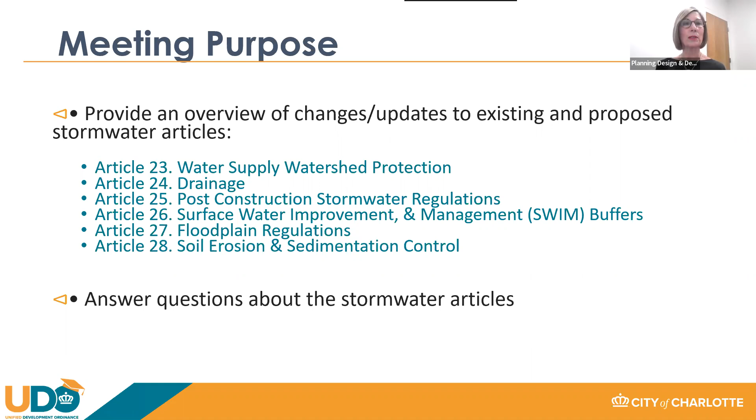Our presenters today are Gurveer Uppal, City of Charlotte Stormwater Services; Robbie Zink with Stormwater; Jordan Miller, Stormwater; David Good with LUESA, Mecklenburg County; and Jay Wilson, also with City Stormwater.

And with that, I'm going to turn it over to Gurveer to talk about the UDO Article 23, the water supply watershed updates. Thanks, Nan. I'll start with the water supply watershed updates. So the first key change here is we're moving from Chapter 10 of the City Code to Article 23 of the UDO. Variances will be reviewed by the UDO board instead of the ZBA.

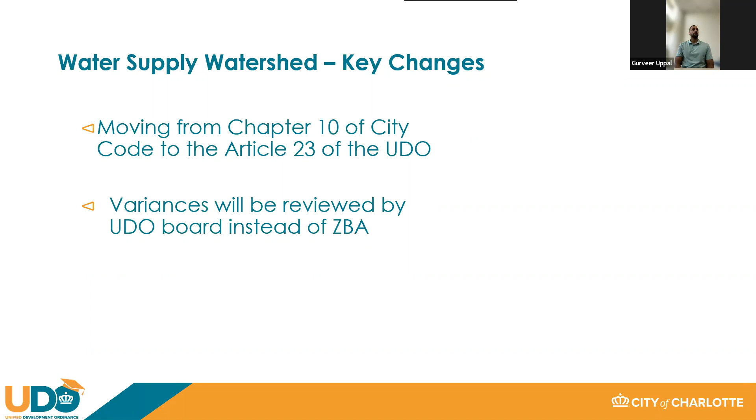Here we have a picture of the water supply watersheds. You have your Lake Norman, your Lake Wylie, your lower Lake Wylie, and your Mountain Island Lake, and those are also broken out into your critical areas and protected areas.

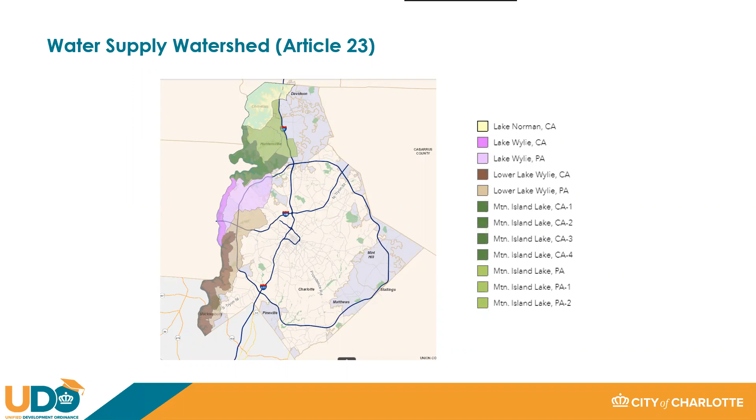This information is currently online, but we don't have it in this table format, so we are going to be putting it into a table to make it a little easier to find. Here you have the Mountain Island Lake watershed, with your low density options for your critical areas and protected areas. You'll see there's no high density option there, so everything will remain low density. Same for the built upon area — there's no option for non-residential in the critical areas, but there is in the protected areas.

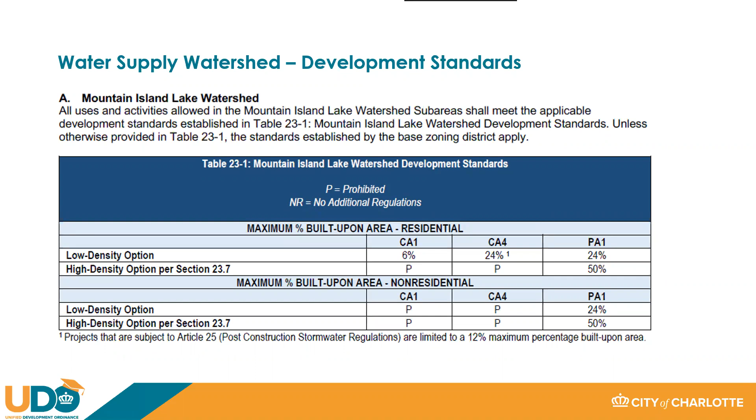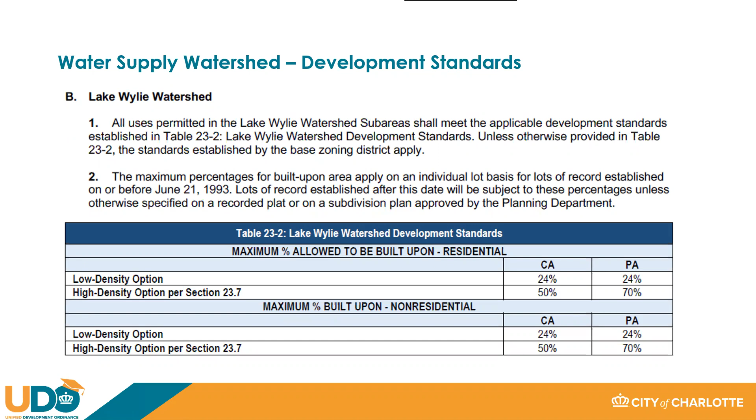Here's the same table, this one just for the Lake Wylie watershed. You have your high density option and low density option for each of the critical areas and protected areas. And once more, this is that same table for the lower Lake Wylie watershed. Again, you have your low density option and high density option for your critical area and protected area, for both residential and non-residential development.

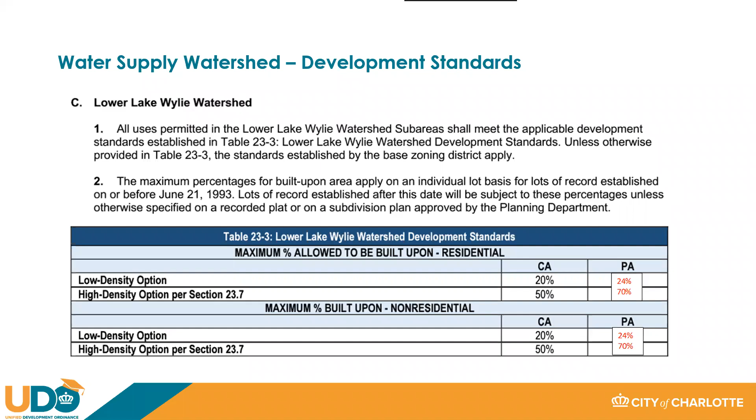Here we have your buffer requirements for the Mountain Island Lake watershed. Your critical area always has that 100-foot buffer, and then you also have your FEMA flood fringe areas. So for the critical area, your buffer becomes whichever is greater, the 100-foot or that FEMA flood fringe. Your protected area is set with a 50-foot buffer and 100-foot buffer for both options.

Below that, you have your Lake Wylie watershed buffer requirements for both the critical area and protected area, with those same two options for high density and low density.

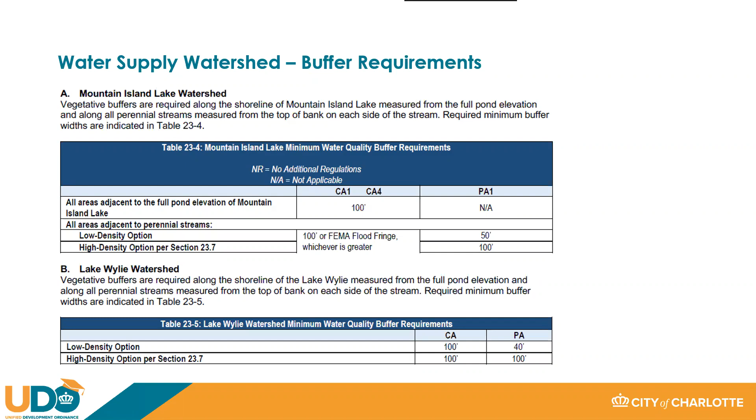And then I'll turn it over to Robbie for drainage.

Thank you, Gurveer. We should probably set this disclaimer at the beginning: for those that went to the city county workshop a few weeks ago, you can probably do some other work or take a nap for a little bit, because a lot of this is the same information we shared at that time.

So this Article 24 is the drainage article. It's a new article. There are no real requirements in any ordinance per se currently, so it's all new. The applicability applies to the construction of any new structure, driveway, streets, or parking lot, or the installation or modification to a city's drainage system, or land disturbances that modify or impact existing drainage features.

The intent of this article mainly is for residential infill that the city is seeing an increase in over the last few years, and that has created numerous issues for stormwater and for adjacent property owners.

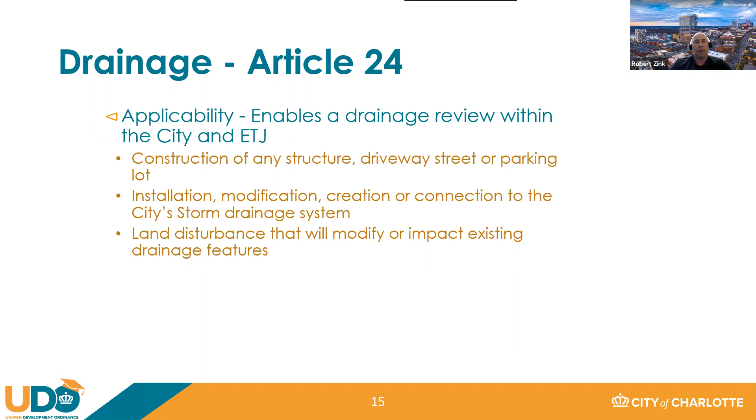So going along with that, why do we create the article? It is modifications being made to the system which we aren't aware of, structures within our easements, substandard drainage being installed, properties putting in flood prone areas, adjacent property flooding, driveway conflicts, and developing in areas with known drainage issues.

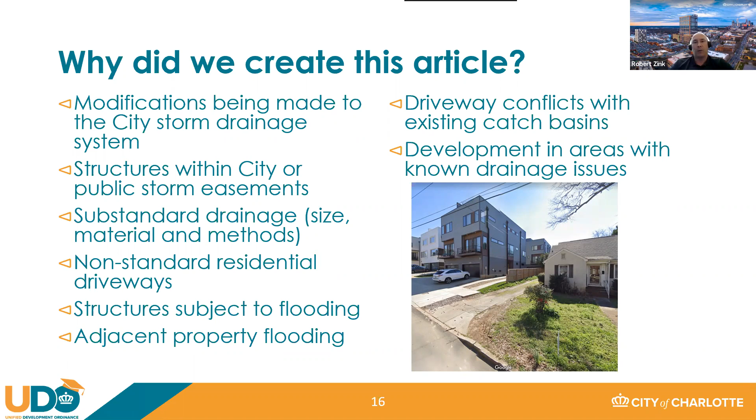Okay, so next we'll go through a few examples of things that have occurred within the city that have created some issues for stormwater. These are the things that we're trying to prevent with this new article.

In this situation, you can see in the top picture some existing single family houses that were torn down and rebuilt with large duplexes. On the left-hand side, you can't see it, but there's a stream right next to this. Modifications were made to a gabion wall, increasing its height, which creates some stormwater issues. And the other issue is this is right near a low spot since it's near a creek, and the driveway doesn't take much for water to overtop it and flow down into the garage and the living space.

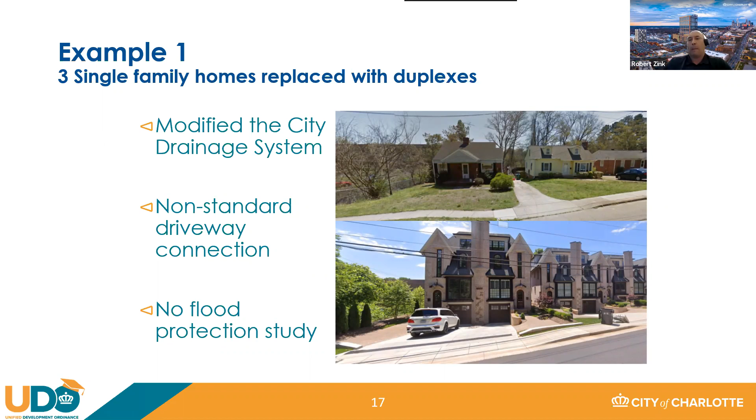Next. Another single family redevelopment. The left-hand side is kind of a before picture, and the bottom left is actually during construction. There was a drop inlet in this yard. The house was rebuilt, the yard was raised up, and there's a drop inlet you can barely see in the back part of the picture. It was raised, and on the bottom right you can see after it's built, with the fence, there was no way for the water to drain out.

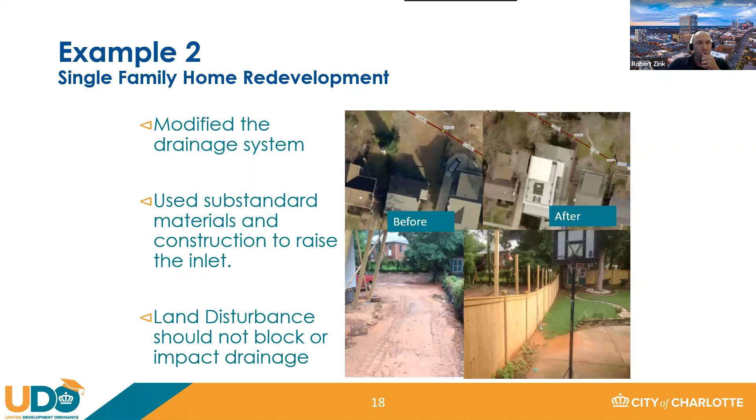Sorry, next. This example is of a porch or expansion to an existing house, and it was built over the top of a 24-inch pipe that actually had an easement on it. That pipe is about 7.5 feet deep, so as you can imagine, any issues with it, or maintenance of it, is impossible.

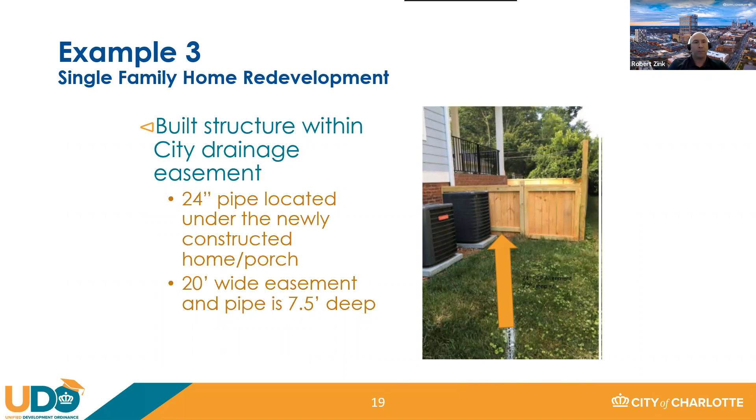All right, this last example is another tear down rebuild, putting in 4 lots where there used to be 3 parcels. In the bottom left picture, you can see where the houses were built, the grade was raised, and they installed pipe. The pipe was undersized. They installed HDPE, which if constructed properly is okay, but we've found that's rarely the case, it's rarely installed properly, so there are always numerous issues with it if it's not done correctly.

In this case, that unit on the right, the house, had about 3 feet of water in it in the first significant rain. Next.

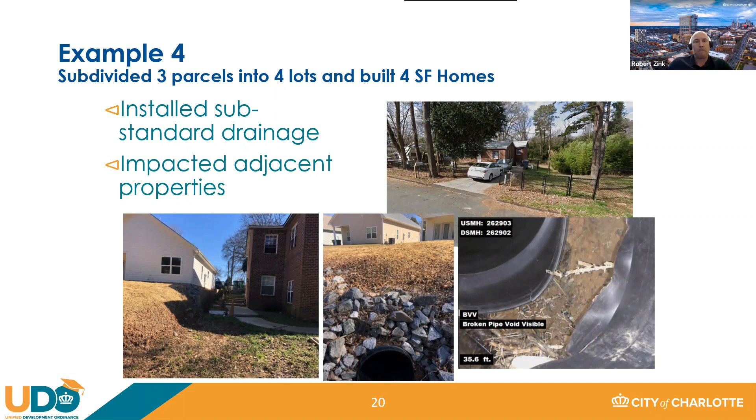So the process we're envisioning to comply with this is a concurrent review with the building permit process at the county. Approval of this permit would be required prior to the building permit, and review of the stormwater is sorted into 3 tiers. For those of you that listened to the urban forestry or tree presentation a few weeks ago, we do plan on doing a concurrent review with them, since they'll be looking at very similar things.

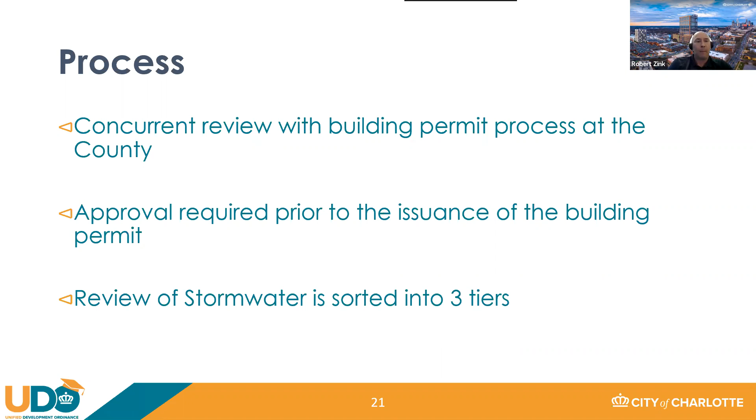Back to the tier issues in our tier document we're creating: a Tier 1 review is for minimal or no impacts to existing drainage systems, so no sealed drawings or design would be required. Here's some general plan requirements: site plans to scale, proposed grading if grading is occurring, proposed built-upon area, and existing and proposed infrastructure with dimensions from that infrastructure.

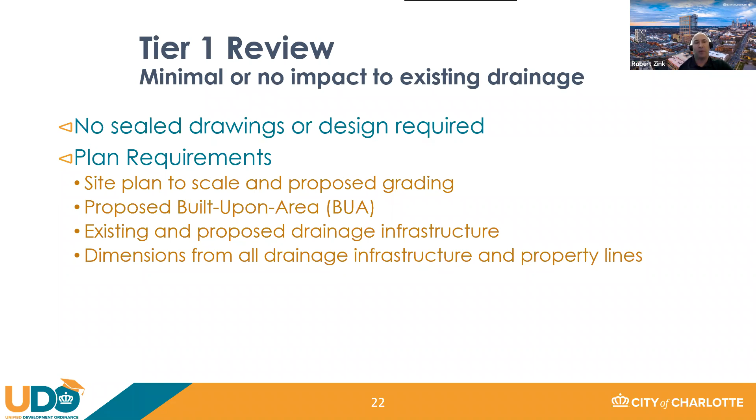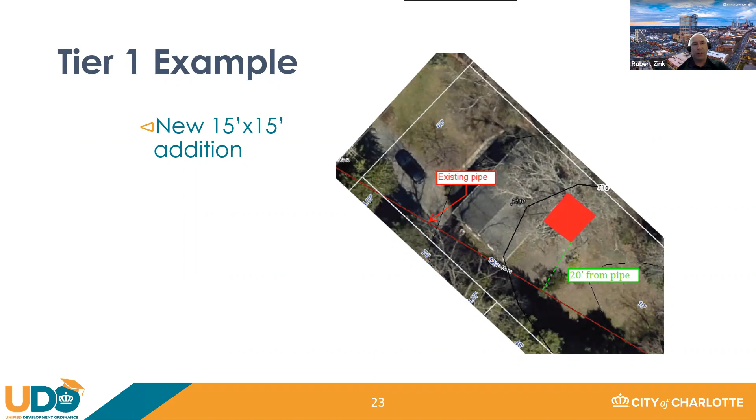This is an example I drew up of a 15 by 15 addition on the back of a house. The red line on the bottom shows an existing pipe, and dimensioning from that, you can see we're about 20 feet away from the pipe. So we believe there's no issue here, and that would be a quick approval.

Tier 2 is where new infrastructure or modifications to existing infrastructure would apply. These would need to be sealed by appropriate design professionals with existing and proposed detailed grading, and the drainage plan would need to show existing and proposed easements and any supporting calculations.

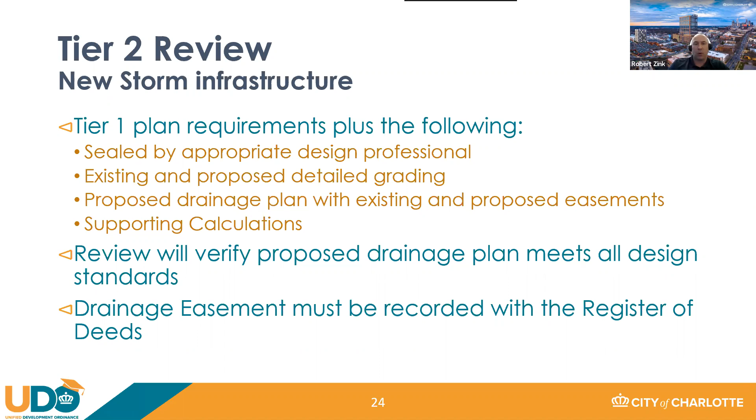The review will verify this proposed drainage plan meets all design standards, and any easements must be recorded with the Register of Deeds. Here's another example on the same site, a 20 by 30 garage, closer to that pipe, or actually over the top of the existing pipe, so it would need to be relocated. As you can see, we drew a driveway over the top of the pipe, which would be okay, so we're not preventing that.

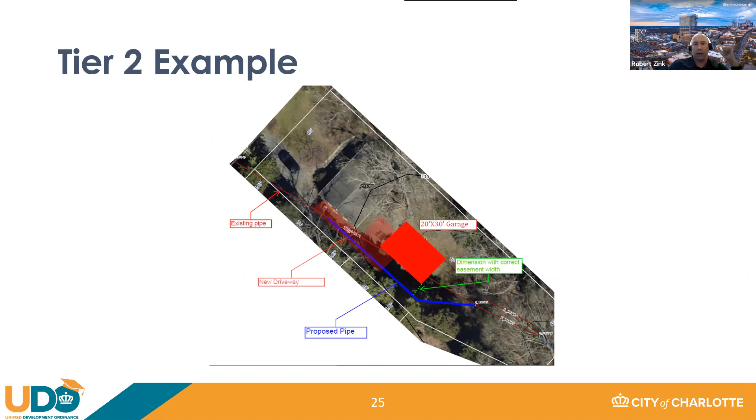Tier 3 is for where you would find flood study requirements and/or post-construction stormwater requirements, which Jordan will address further. This includes Tier 1 and Tier 2 plan and calculation requirements, plus a flood study if required, which is needed if the flow is greater than 50 CFS in the 100-year storm. It would also have to show any post-construction stormwater compliance using our BMP manual.

Plats would be required to record the easements and any stormwater protection elevations and stormwater elevation lines.

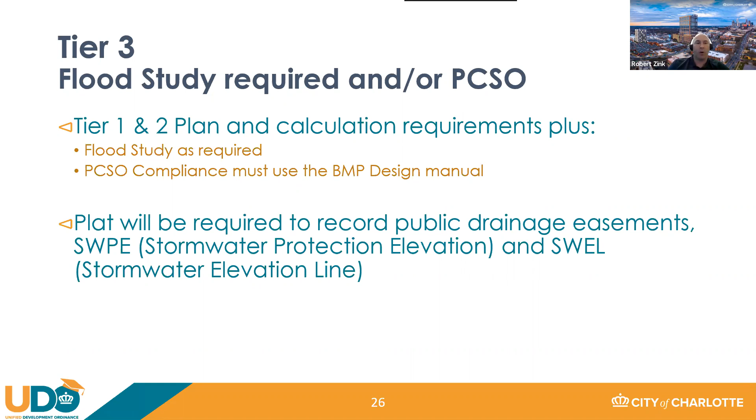This example is of a new home adjacent to a creek, which does get more than 50 CFS in the 100-year storm. A flood study would be required and would possibly have post-construction stormwater requirements.

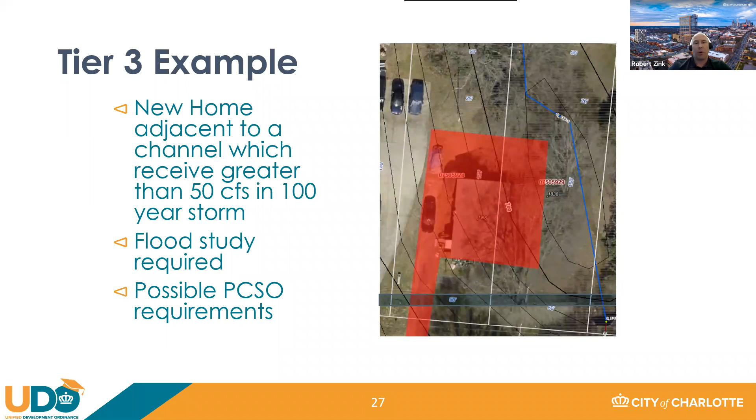Next, we'll go to Jordan Miller with the post-construction changes.

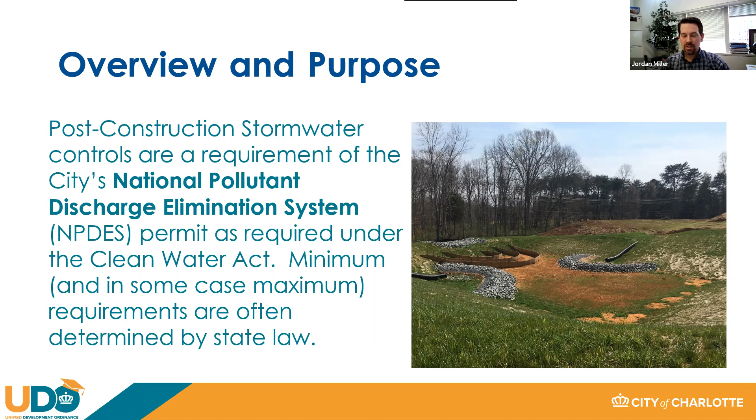A little bit of background: I know a lot of folks already know this, but the city's post-construction stormwater ordinance is required. All large municipalities have to have something to regulate flow and pollution from sites after construction, so this is a requirement of the city's NPDES permit.

Overview and purpose, none of this changes. It's an existing ordinance. We want to minimize impacts to downstream properties from both a flooding and pollution perspective, improve surface water quality, and minimize damage to infrastructure and property. A key term: built-upon area is impervious or partially impervious materials, including gravel, rooftops, and those types of things.

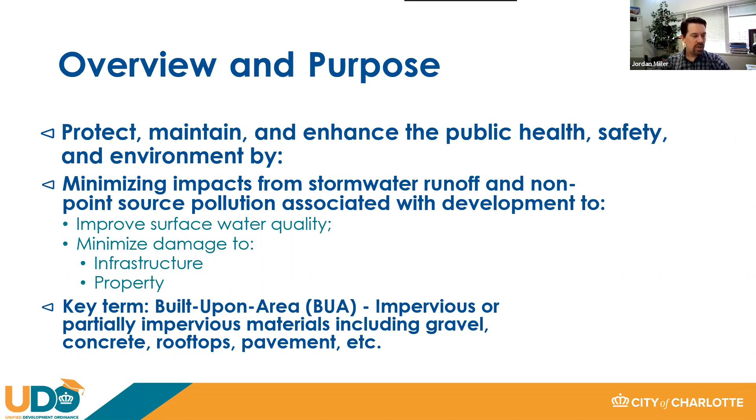Current requirements for post-construction reside in Chapter 18 of City Code. Stream buffers vary from 30 to 200 feet, dependent on location and drainage area to the stream. There are several functions of the buffer, but essentially they protect habitat and improve water quality within a riparian corridor around creeks within Charlotte. These are required on all intermittent or perennial streams, as determined locally by a qualified professional.

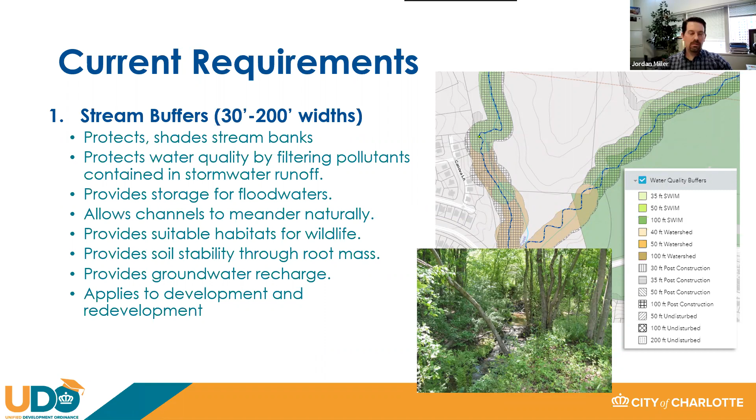Currently, we have a natural area requirement in post-construction. It's essentially a percentage of the site depending on the development type and density that can be provided in several locations on the site, but it's just a preserved area to remain natural or reforested.

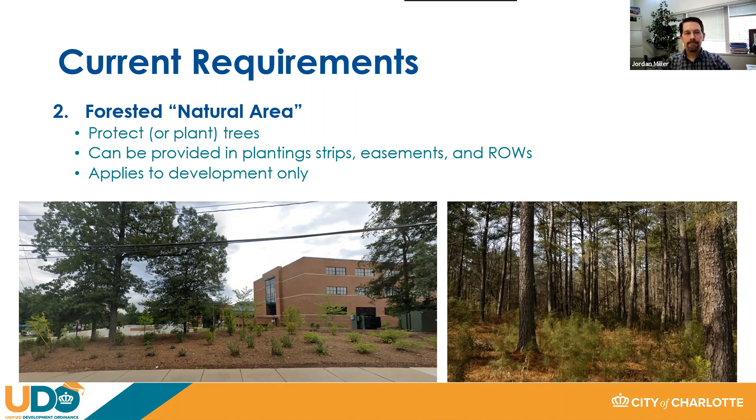The biggest section of post-construction is the structural controls required, providing detention and preventing downstream flooding as well as water quality. We have several storms that must be detained to prevent downstream flooding and erosion, and pollutant removal required within these stormwater control measures, or stormwater BMPs as they were previously called. Some pollutant removal requirements depend on watershed; there are 3 different watershed districts within the city's jurisdiction, so depending on where you are, you may have a slightly different requirement, all listed within current and proposed ordinance.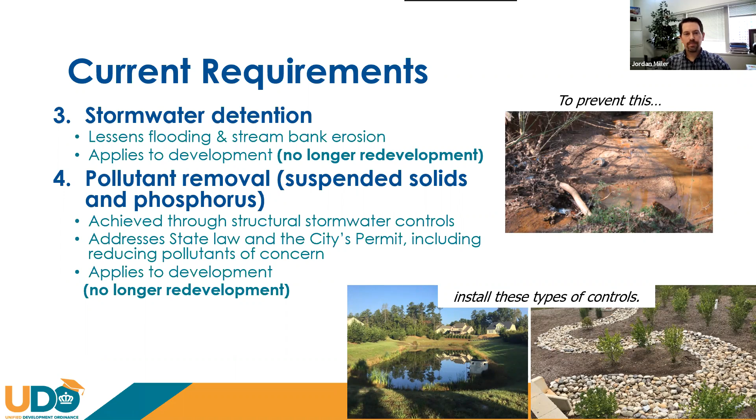So most importantly, that was just a little background. What's changing is this moves from Chapter 18 to Article 25 in the adopted UDO. There are revised thresholds for compliance of what triggers a post-construction review and approval. We also looked to align some requirements across our older ordinances and remove some older exemptions. Post-construction was originally adopted in 2008, and a couple of the exemptions no longer apply, so we removed those just for ease of readability.

Go ahead, next, Brennan. I'm trying. Hold on. Oh, you're good.

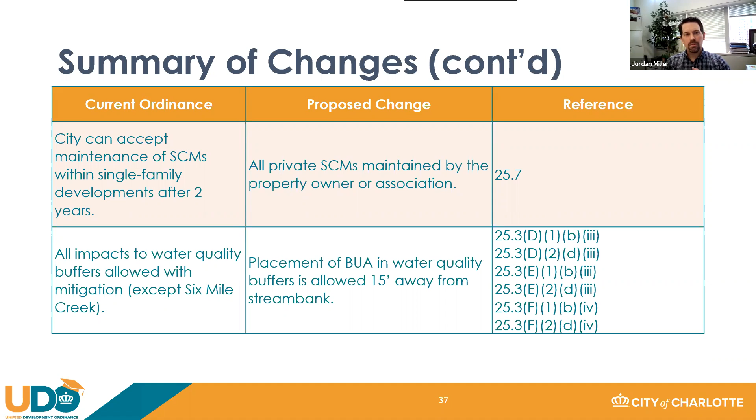Oh sorry, a couple more. A couple exemptions to flag for folks who might not be as familiar with this ordinance. Following are exempt if approved prior to July 1, 2008 - that's the current date for post-construction, so that carries over in the UDO. Essentially it'd be a plan submitted for approval or somehow still valid and unexpired. So if there was a plan still valid through a long amount of resubmittals, or some ongoing construction that was still valid, it would remain exempt if that occurred prior to that date, or if you had a preliminary subdivision plan still valid for non-residential.

And then the common law vested right is a typical exemption for most municipalities when it comes to stormwater regulations. So that remains, and it's somewhat case by case, as you can see there - it's dependent on what occurred on the site and at what time.

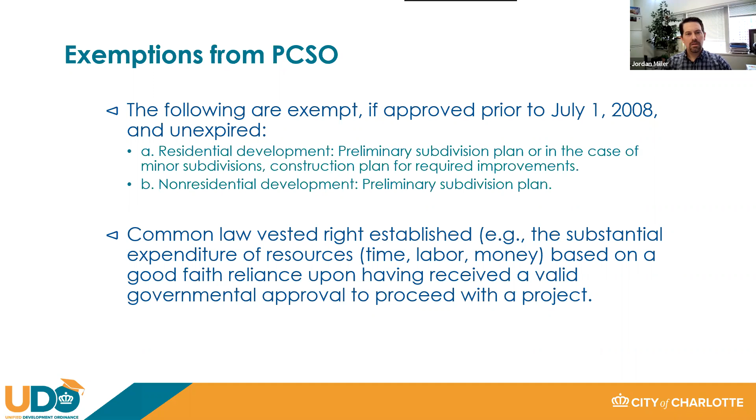Next, one sort of maybe now less confusing exemption is that we've had an exemption for conditional zoning districts that were approved prior to the July 1st, 2008 date. There were some sunset dates when you had to submit plans, but those have all since passed for many years, so we removed that language. Now it's just if you have an initial rezoning that was approved prior to that date and has been built out 22.5% prior to that date on the screen and meets a couple extra requirements, then they would continue to be exempt from this new version of post-construction, just as they were from the current post-construction ordinance.

And then the last one, I'm mainly just flagging what I talked about a minute ago with the built upon area or disturbance. It is an 'and,' so you have to both be under 5,000 square feet of built upon area and disturb less than 1 acre in order to be exempt. If you hit either one, then you do have to show compliance with the ordinance or the article.

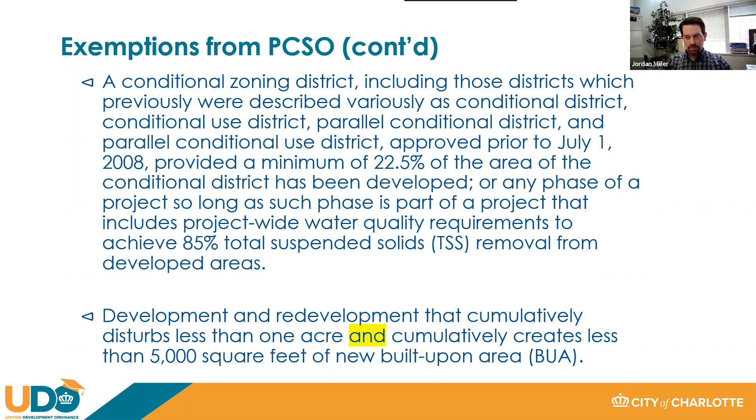These are two other existing exemptions that rolled over. You have a lot in the city's jurisdiction that was recorded prior to July 1st, 2008, and is less than 20,000 square feet in size, then it is exempt from this article, just as it would be in the current ordinance. One very important caveat is that it applies only if you are developing just that lot. If there's any part of a larger common plan of development, which generally means there's a definition in the article — I won't read it word for word — but if it gets combined in any way with another lot, then that exemption would not apply. So that should be one lot recorded prior to 2008, less than 20,000 square feet.

And the last exemption is very uncommon, but it's required to be in there. Essentially, if you were having to meet a requirement from one of those sections, the work associated with that would not somehow trigger this requirement. I don't know of an actual ongoing farming or forestry activity that's occurred in the city that's met this, but that remains in the ordinance as well.

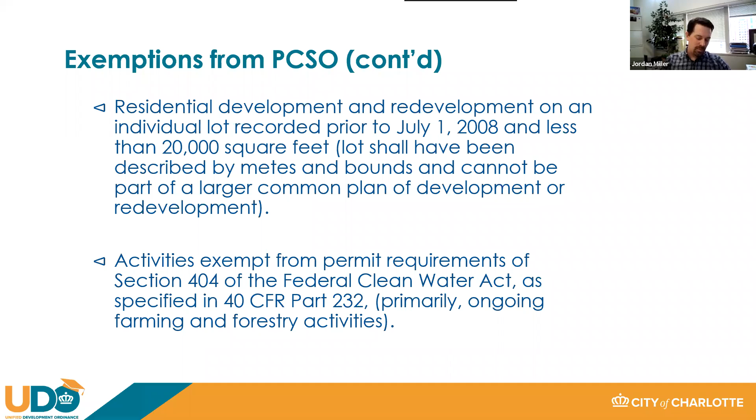And I'll kick it back over to Gavir.

Thanks, Jordan. I'll go into surface water improvement and management buffers, your swim buffers. We touched on some of this already, as this information was also in that previous PCSO portion. Our environmental report card shows that many of our streams in the Charlotte area are not swimmable or fishable, so we are working to reverse that or reduce the amount of pollution in the streams. That's where the buffers come into play, and these are a requirement as part of the post-construction stormwater ordinance.

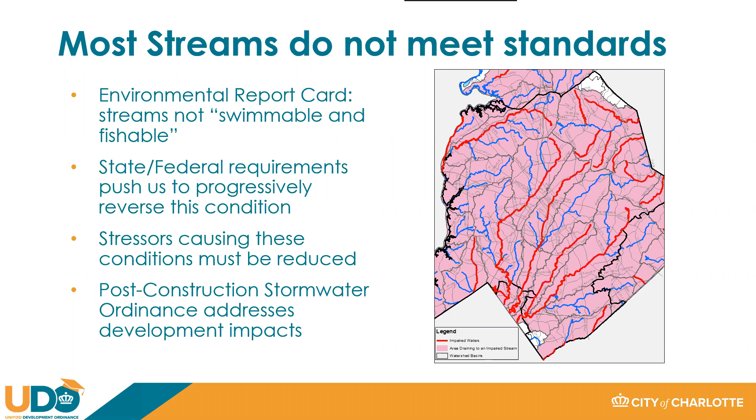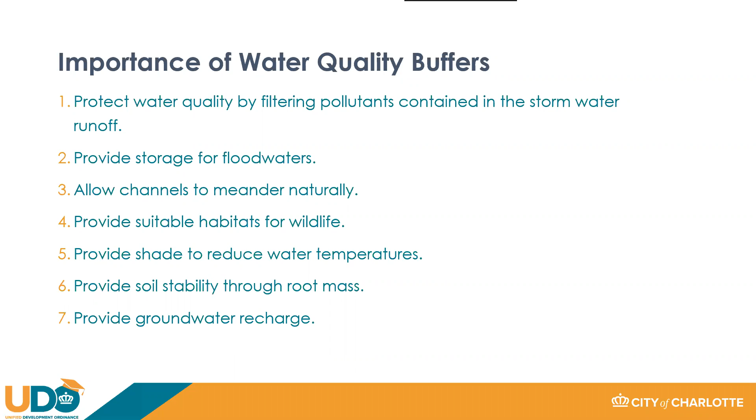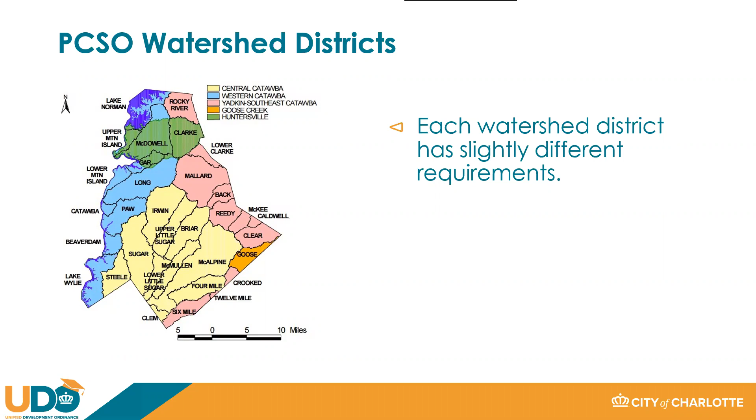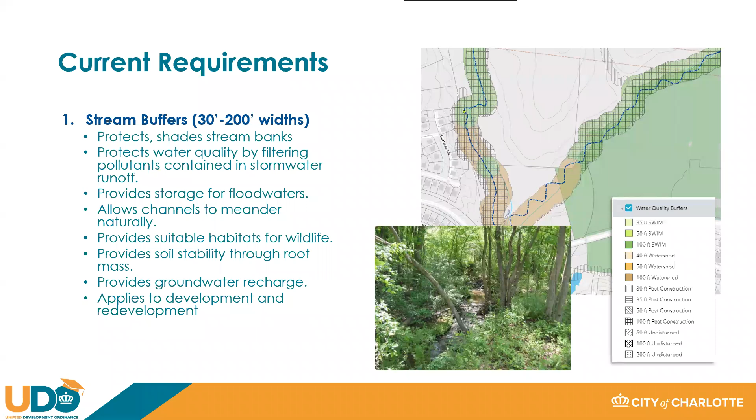Once again, we have a picture of those buffers, which vary in width from 30 to 200 feet depending on the watershed. The key change here is moving from Chapter 12 of the City Code to Article 26 of the UDO.

Basically, the swim buffer has been in effect since 1999. This applies to all intermittent and perennial streams that drain at least 100 acres. Once again, those widths vary from 35 to 100 feet. If no buffer is required, we do recommend that you maintain a 10-foot undisturbed vegetative buffer measured from the top of the bank on each side of the stream. Streams that are to be piped in must get approval from the U.S. Army Corps of Engineers and NCDEQ.

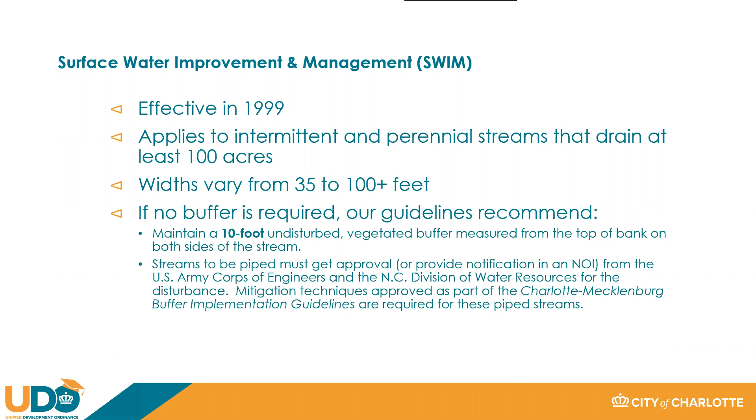And if you are piping that stream in, you are required to mitigate for the buffer that will be going away. Let's go to the next slide.

Here we put those numbers into a table to help identify your buffer widths for each region or stream size. You can see you have for streams draining greater than 100 acres, with your stream side zone, your managed use zone, your upland zone, and the total buffer width.

For those streams draining between 300 and 640 acres, you have the middle row with 20-foot, 20-foot, 10-foot, giving you that 50-foot width on the buffer.

For those streams draining greater than 640 acres, you have that 30-foot stream side zone, that 45-foot managed use zone, and then your upland zone will be 25 feet plus 50% of the area of the FEMA flood fringe beyond 100 feet.

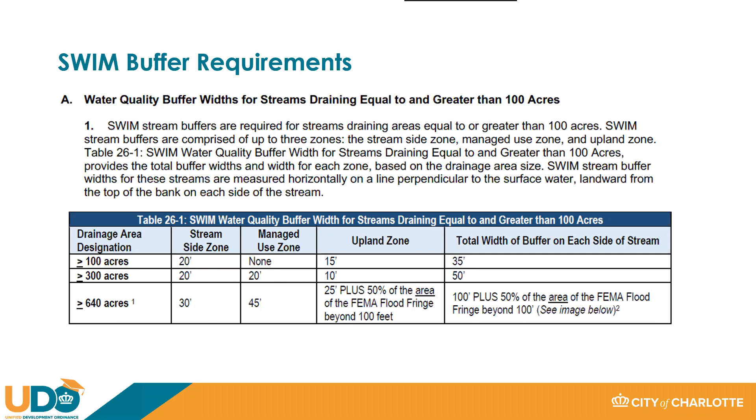On the next slide, we added a little graphic to help you determine that width.

On the first one on the left side, if your 100-foot swim buffer is closer to the top of the bank, your 50% area will be measured from the area between the FEMA flood fringe and the encroachment line.

If your community encroachment line is closer to the top of bank than the 100-foot swim, then you'll take 50% of the area between the FEMA flood fringe and the 100-foot swim.

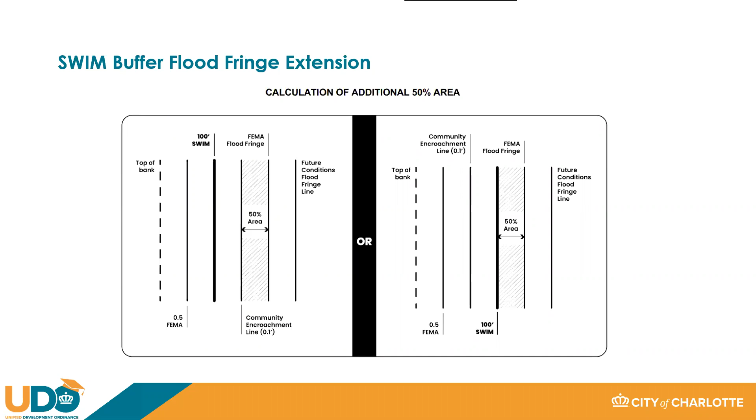Here we have an updated graphic showing those 3 zones: your stream side zone, managed use zone, and your upland zone.

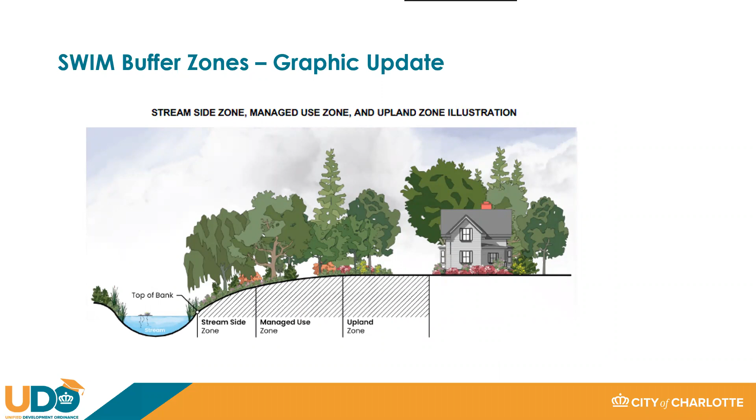This is currently in the buffer implementation guidelines, and we're just updating that table. It shows the function, the targets, and the impacts of each of those zones for your stream side zone, your managed use zone, and your upland zone. The most restrictive is the stream side zone; a bit more is allowed in the managed use zone; and the upland zone for the most part can be impacted in all situations.

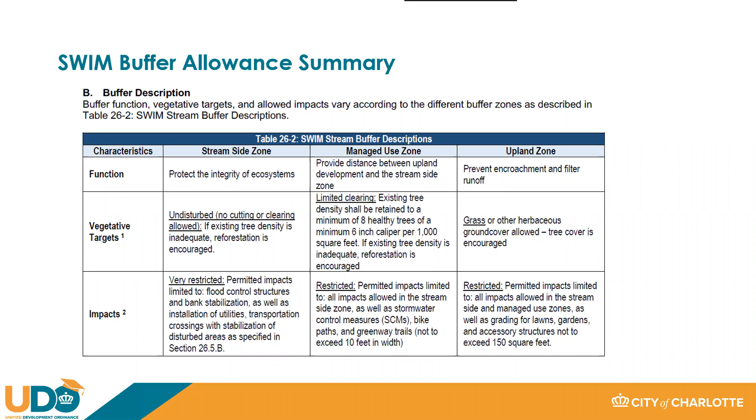Let's go to the next slide, and then I'll turn it over to David for floodplain regulation.

Good afternoon. I'm going to give you an overview on floodplain regulation in Mecklenburg County. I'm the floodplain administrator for the city of Charlotte and all 6 towns, and there's a fairly consistent regulatory scheme across the entire county. Even though the city and the rest of the towns have individual floodplain ordinances, we're trying to be consistent.

For those of you that don't work in this area, the purpose of the floodplain regulations is to reduce impacts to people and property from flooding during major storm events.

Another purpose of the floodplain regulations is that you have to have a floodplain ordinance in place in order to participate in the National Flood Insurance Program. So for flood insurance to be issued in Mecklenburg County, we have to have a floodplain ordinance with minimum standards.

These standards are national standards, since this is a federal regulation. You have to meet these minimum standards in order to issue flood insurance.

Another aspect of the city of Charlotte's floodplain ordinance is that we go above the minimum standards. We have certain higher standards that we regulate to.

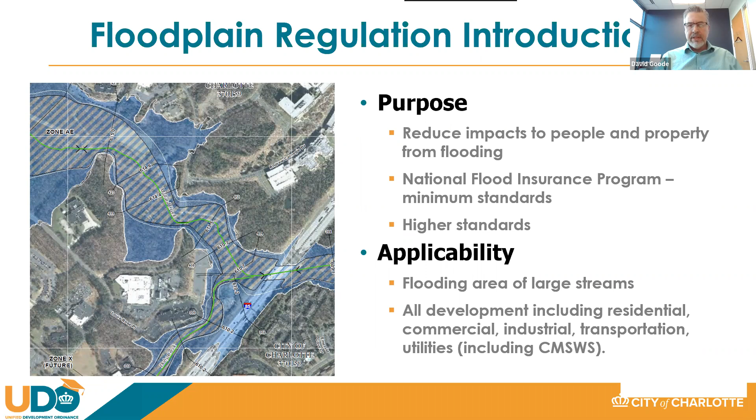Now I'm just going to generally talk about some changes that were made prior to the adoption of the UDO, and then I'll talk about some individual changes that are included in the UDO adoption.

If you do work in this area, you're probably familiar that last year on January 1st we made some revisions to the previous ordinance, because we needed to get some stuff done ahead of the UDO since it was becoming important and critical.

One of these issues was that the North Carolina Department of Emergency Management creates a state model floodplain ordinance, and updates it periodically. In order to participate in the NFIP, you have to conform with that ordinance. So we had some changes to make so that our ordinance as of January last year would be compliant with state requirements.

The second issue we dealt with a year ago was that in Mecklenburg County, for all these streams, we regulate using what's known as the future conditions floodplain. The way we determine the future conditions floodplain is by estimating the storm height for a 100-year storm as if the watershed upstream of some point along that stream has been fully built out.

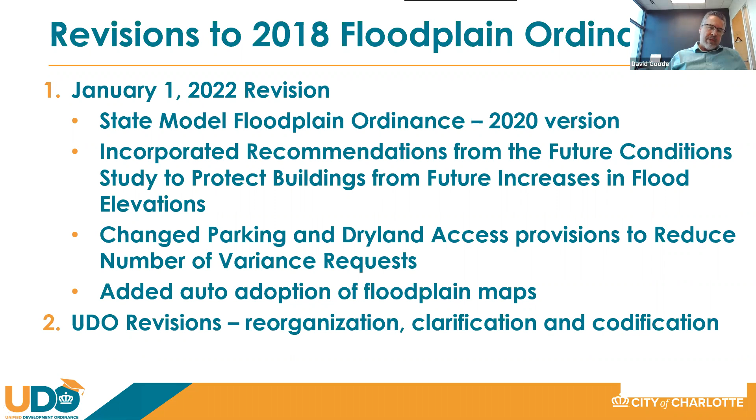Okay, here's the UDO specific changes that we made. For the floodplain ordinance, there weren't many detailed changes in the UDO. The main change is we used to have a standalone ordinance, all in one place, and now the ordinance is divided into two different articles. The meat of the floodplain ordinance, all the specific standards, is located in Article 27 of the UDO, and the enforcement provisions have been separated out to Article 39.

Enforcement provisions are like notices of violation, corrective actions, penalties, that sort of thing. So for folks used to working in the floodplain area, they'll have to look in two separate places, but that's the main change.

Another change that will be adopted under the UDO — and these last few changes are just codifications of the way we normally do business — is that under federal regulations, you are allowed to notify an insurance company or a lender if the owner of a building in the floodplain has a violation, meaning that building is non-compliant with federal regulations and the ordinance.

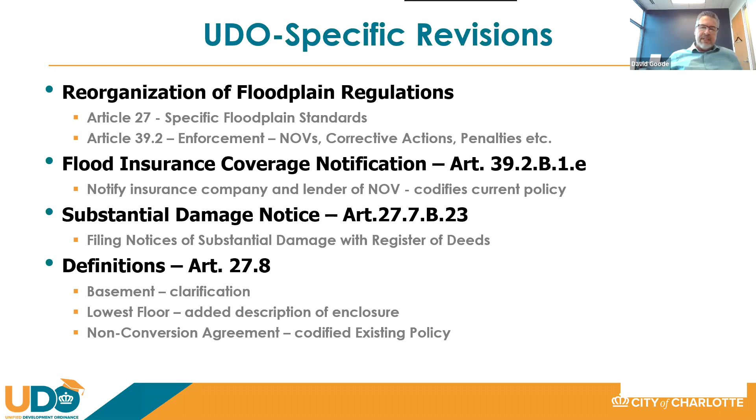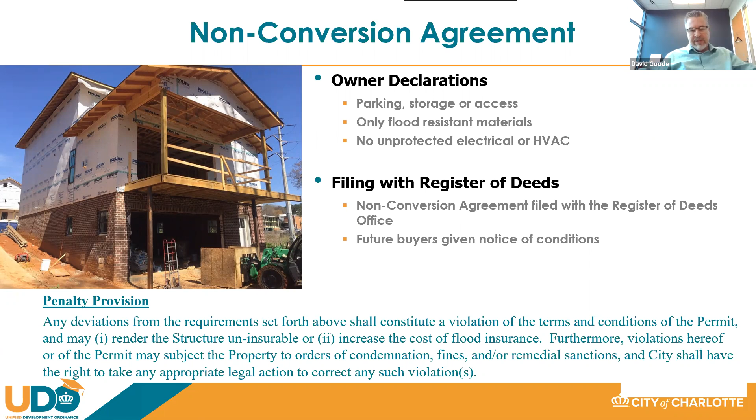All right, good afternoon, everyone. I'll be handling the last section here, Article 28, the Soil Erosion and Sedimentation Control Ordinance. Before we get started, I'll just say that a lot of the changes to existing Chapter 17, future Article 28, are to reflect changes and updates to state law. So there aren't any big changes in store that were UDO inspired, but I'll try to point some of those out as we go on.

Just briefly, for those of you who aren't aware, the erosion control program or construction site stormwater controls are a requirement of the city's NPDES permit. Just as construction sites have to have permits to discharge their effluent to the waters of the state, so do municipalities and cities. As a requirement of the city's permit, a delegated authority or erosion control program is required. The city's ordinance has traditionally been more stringent than state law, and I think we retain a lot of those protective features that are needed in a growing and high density urban area like Charlotte is and is becoming more of. Next slide, please.

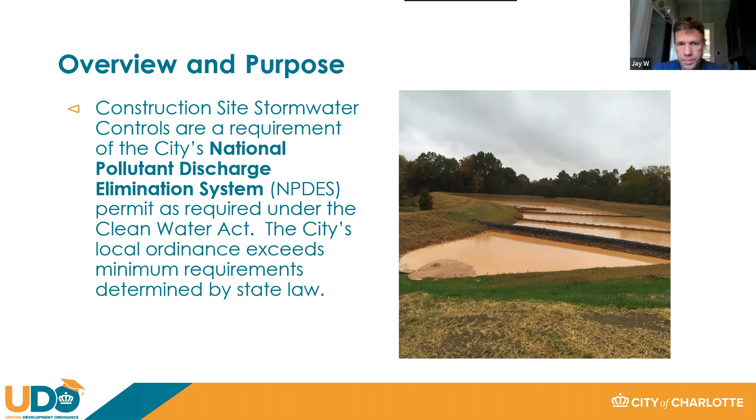So just briefly, the overview and purpose: the idea is that we protect, maintain, and enhance public health, safety, and environment by minimizing impacts from erosion and sedimentation during active construction. Primarily, that objective is to protect surface water quality. We protect private property and infrastructure, but really a lot of this is coming from the place of protecting surface water quality and minimizing damages to streams, creeks, water features of all types, and then of course infrastructure and property along with that.

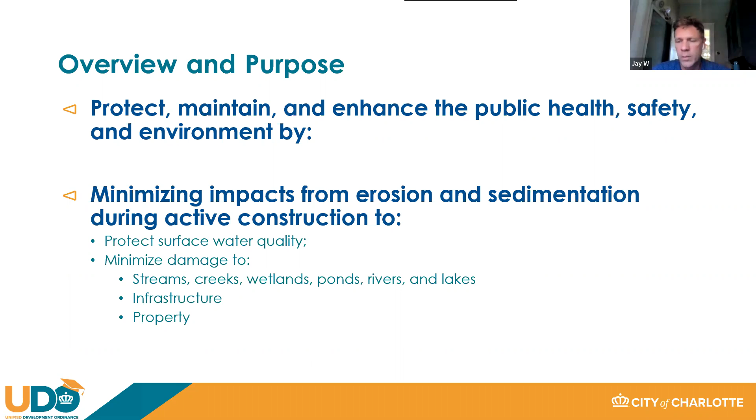I wanted to go over some of the current requirements of the ordinance, and this is really more of a review for folks that may not be aware of what the erosion control ordinance is responsible for and the things we're trying to accomplish. These aren't all the requirements, but these are most of them, at least broadly speaking. We'll go through some of these. Briefly, all land disturbing activities—anytime the surface of the earth is disturbed or altered—those activities must provide adequate control measures. And if you are participating in a land disturbing activity that disturbs 1 acre or more, those protective measures must be ensured with an approved soil erosion and sedimentation control plan prior to beginning the project. The ordinance goes on to outline some control objectives: we identify critical areas, limit time of exposure, limit exposed area, control clean water that originates upstream of the site, and of course control sedimentation and the damaging velocity at the outfalls.

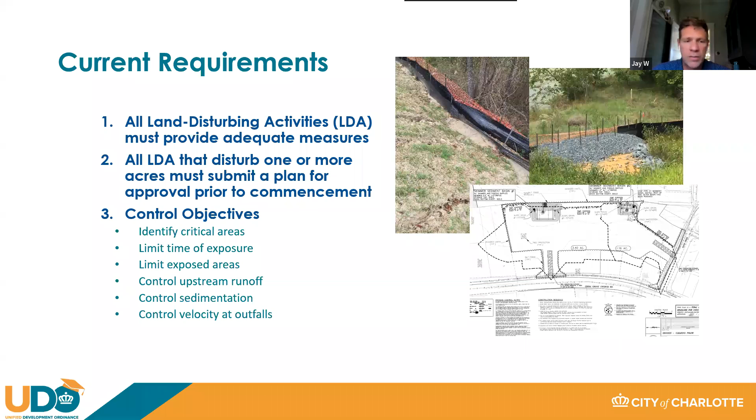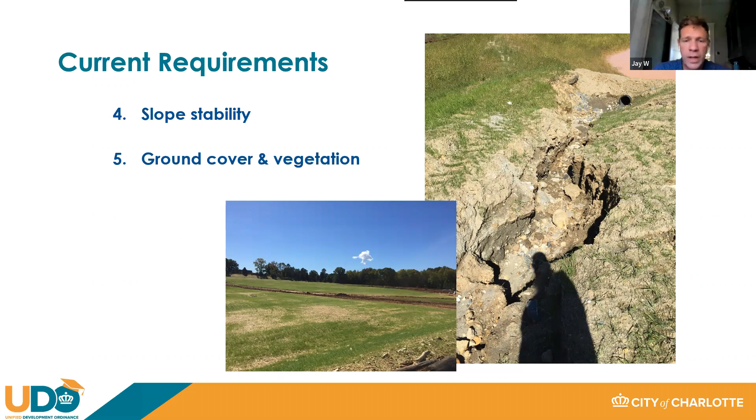Other requirements and notable requirements are for slope stability and ground cover and vegetation. So there's the two troublesome areas during land disturbing activities that the ordinance helps us protect against negative impacts with. The current requirements also require that site operators monitor and maintain their active construction sites. The ordinance states that persons conducting land disturbing activities must inspect their measures at regular intervals to ensure adequate performance, and this is an area where our ordinance has traditionally been more stringent than state standards and continues to be so. The maintenance requirement is such that when measures are not performing at their design or optimal efficiency, site operators must take action to correct those deficiencies so that they function as designed.

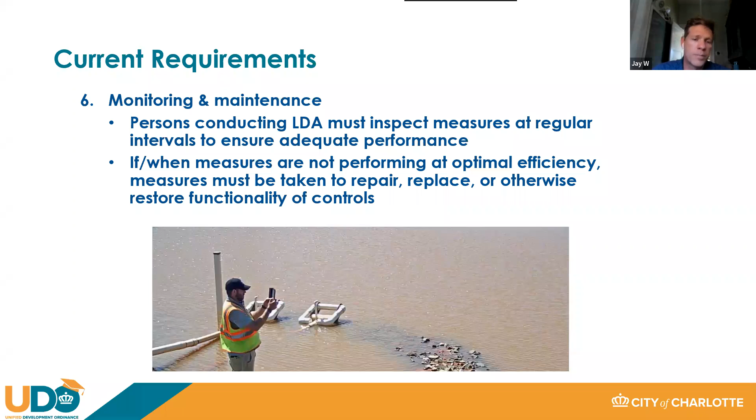Some of the changes I've mentioned already: we're moving from Chapter 17 of this Code of City Ordinances to Article 28 of the UDO. The meat of the ordinance will be in Article 28 now, and really the vast majority of the changes you will see in the UDO as compared to Chapter 17 are to reflect changes in state law since the last ordinance update. For those of you who've been plugged into this process, you understand that UDO has been going on for a few years. We've known this was in the works even before, and we had been trying to be efficient with our requests to council for updates to the ordinance, so we decided to roll these state required changes in with the UDO. So the vast majority of the changes we made to the soil erosion and sedimentation control section are simply to reflect changes in state law.

We also, outside of those requirements, made some changes to align requirements across permit types. What I mean by that is there are several agencies that have jurisdiction over water quality and soil erosion and sedimentation control. At the state level, you've got land quality and water quality. Land quality is where the land disturbance regulations are housed, the Sedimentation Pollution Control Act. Water quality is who issues the permits so that construction sites may discharge their treated water back to the waters of the state. So sometimes, even at the state level, some of the requirements vary—one rule may say you can do things one way, and another rule lines out a more stringent requirement. We've always had a blanket statement in our ordinances saying the most stringent requirements apply, rather than relying on that blanket statement. We try to just find the more stringent requirement in our ordinance in an attempt to minimize confusion.

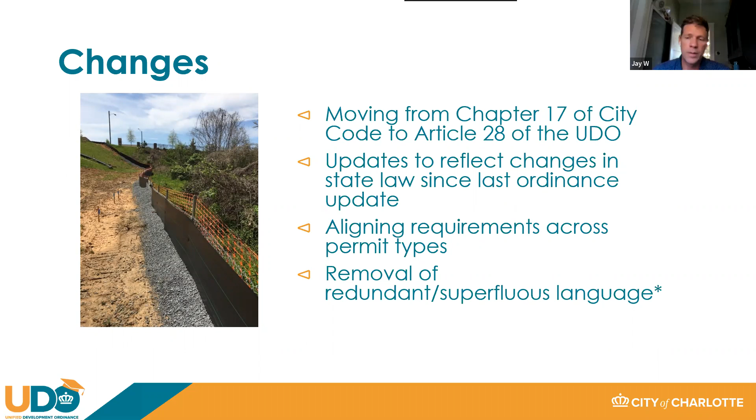Next slide, please. This is a summary of changes. This is by no means a comprehensive summary of the changes, but it includes some examples of the types of changes that were made. For anyone interested in a more complete list of what was changed, I'm happy to connect with you outside of this and explain in further detail.

Some of the changes are: we added a sedimentation control buffer, which is in the Sedimentation Pollution Control Act and state law. We did not have that provision in our local ordinance. This shouldn't be confused with SWIM buffers or post-construction buffers. These are buffers intended as an alternative to other treatment methods that may provide adequate treatment to construction site stormwater discharges.

There was no provision about the type of fill material that was used, and that's in the state law. We wanted to add that in.

One of the most substantial changes made to the ordinance was the change in the frequency of the rainfall triggered inspections. As of April 2019, the state of North Carolina issued a new general permit for construction site stormwater discharges, that's soil erosion and sedimentation control, and they changed their rainfall triggered inspection frequency from a half-inch event to a 1-inch event.